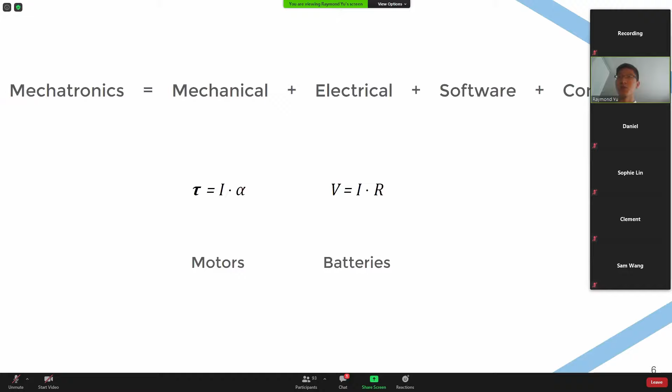In terms of software, we've all seen a bit of code before. It could be as simple as Arduino code, or as complex as machine vision.

Finally, the last part of mechatronics engineering would be the controls aspect, and you can see here there's a little feedback loop. A prime example of a controls engineering problem would be an autopilot system, whether for an aircraft, a ship, or a self-driving vehicle. Mechatronics is very multidisciplinary, incorporating aspects from all these different subsets.

And that leads me to my definition: a mechatronics engineer works at the interface between hardware and software systems, or essentially anything with moving parts that requires power.

Reiterating the definition, there are many different applications, ranging from automated manufacturing lines. We can see a multi-axis robot where you supply power to the motors, then turn the mechanical fixture so that the end of the arm reaches one point in 3D space without overshooting, reaching that exact point using a controls algorithm.

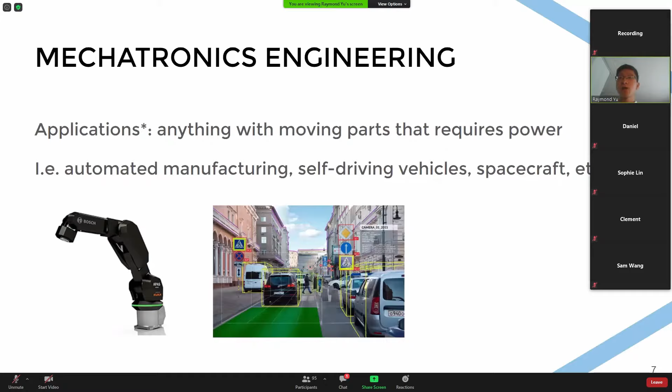Another application would be self-driving vehicles, taking data from various sensors, be it GPS or a computer vision camera, and then actuating the wheels, turning the wheels, or applying braking force.

A further extension is spacecraft or aircraft, which I'm most interested in. For example, the autopilot system of an aircraft is very much a mechatronics problem, trying to maintain level flight even in adverse weather conditions, to ensure all passengers on board have a pleasant experience.

Now I have a little asterisk next to the application. Even though my definition is that anything with moving parts requiring power is mechatronics engineering, that doesn't mean you can't specialize in a particular field of it, because mechatronics engineering offers a great foundation in various technological disciplines.

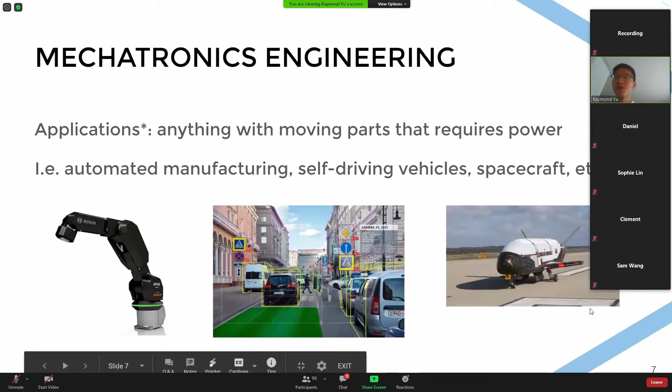So how can you start yourself? Well, all these things have one thing in common. You can all start learning or experiencing what it's like to be exposed to mechatronics engineering by just having a little Arduino project, driving a motor, perhaps holding a position, getting user feedback, so you can experience this at home.

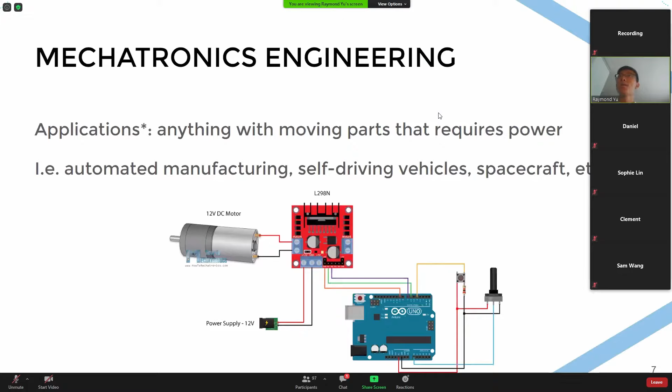Now this would be the first case study which we're going to explore. A little shout out to the UBC Unmanned Aircraft Systems student design team for providing these lovely graphics, and also for providing me the invaluable experiences which allowed me to succeed today.

Now, first off, what is a drone? The US Federal Aviation Administration defines a drone as a powered unmanned aerial vehicle that can fly either remotely or be flown autonomously, and can also carry a payload.

They can range from very large fixed wing drones that can be weaponized, like you see on the left. They can also be little hobby grade RC aircraft, as you see in the center. And they can also be the very ubiquitous and widely proliferated DJI drone products you see on the right-hand side.

In this particular case study, we're going to be exploring a drone that's the size of the DJI product on the right-hand side. In the subsequent case study, we're going to explore a slightly larger drone, in between the size of the center and left-hand drones.

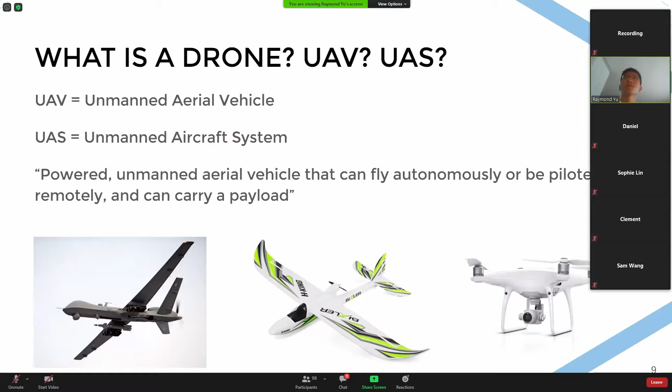So this is the drone in question that we're going to be exploring. This is a custom designed, custom built quadcopter with around 25 minutes flight time, with a maximum takeoff weight around 5 kilos. It's a very robust engineering tool.

Let's continue with the drone architecture. You can see the drone is comprised of many different components, but at the heart of every drone is a flight controller, which is that orange thing labeled cube. That's the brains of the drone - all the sensors, all the motors, any peripheral all reach that at one point or another.

Then towards the left, we have the payload. Oftentimes it's a camera, but it could also be a smaller unmanned ground vehicle, or a package to deliver, for various different applications.

Towards the bottom, we have the motor and motor controller, which provide the lift and power required for the drone to lift off. There's a power distribution board separating the energy from the battery to feed into both the motors and all the other peripherals, like the flight controller or the payload.

And then towards the top right, we have the range of sensors and telemetry systems which allow the drone to sense, to feel, to know where it is in 3D space in order for it to complete its mission.

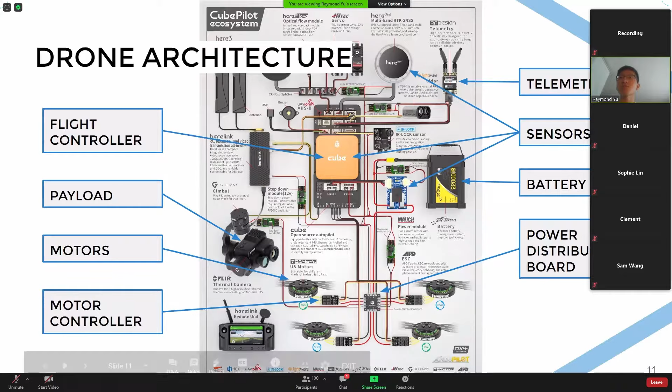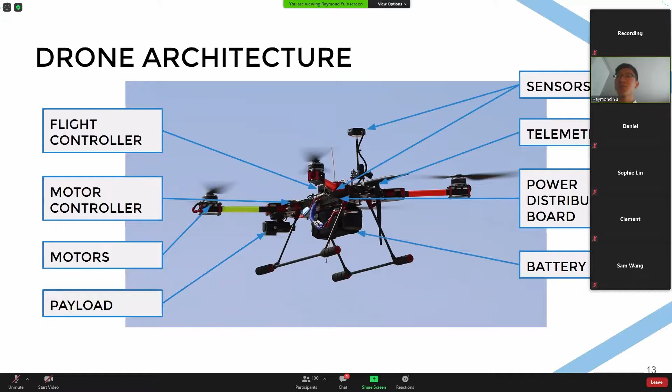Now, bringing it back to this drone, we can see that the architecture is labeled. Towards the center of the drone, we see the flight controller, slightly hidden by a boom. We see the motors and motor controller at the end of the boom and within the frame. We have a payload of a camera in this case. We also have a battery, a nice big heavy brick, in addition to a power distribution board above it, and we also have the telemetry and sensor suite. The sensor right at the top of the drone is the global positioning system.

Now I'm going to be emphasizing the flight controller, the propulsion system, which comprises the motor and motor controller, as well as the sensor and navigation suite of the drone.

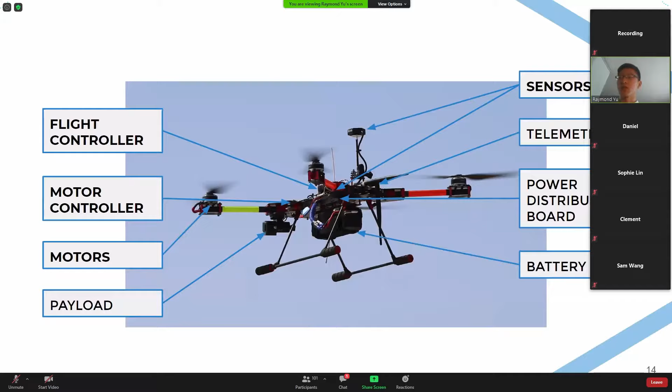So this is the flight controller. Without a flight controller, the drone would likely crash, so it's a very key part of the aircraft. It is the brains of the aircraft. Any commands, any user inputs, it's all handled by this little computer on board.

At the output of the PID controller, we have the actuators, which are the motors of the drone. The actuators allow the quadcopter to move around, to navigate in 3D space. Then we have a feedback loop with the various sensors on board. This loop runs continuously with the control algorithm to maintain steady flight or desired flight characteristics.

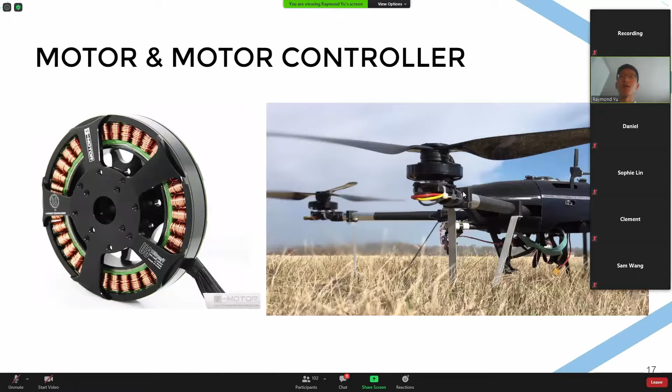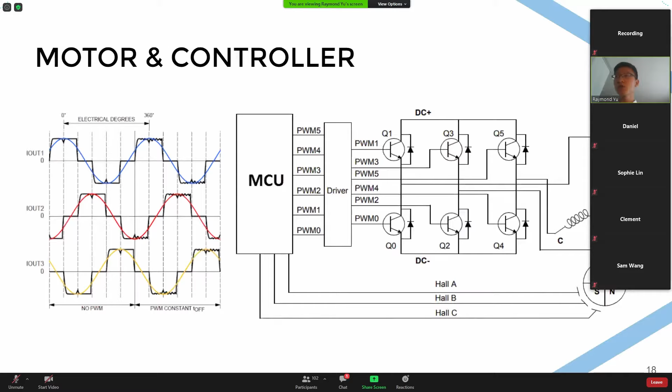The MCU is a little controller, almost like the flight controller, but just for the motors. The controller, the MCU, sends out one of these little signals to a driver. The driver then amplifies that signal, provides more power, more voltage, more current to it, so it can actually be fed to the motor. We have different switches here, which allow the signal to go from positive to negative. That switching sequence then energizes the coils of the motor, thus spinning the motor, the rotor, which comprises permanent magnets. We also have a feedback loop here from Hall effect sensors, which detect the magnetic field of the rotor, and that signal gets fed back into the controller, continuing the feedback loop.

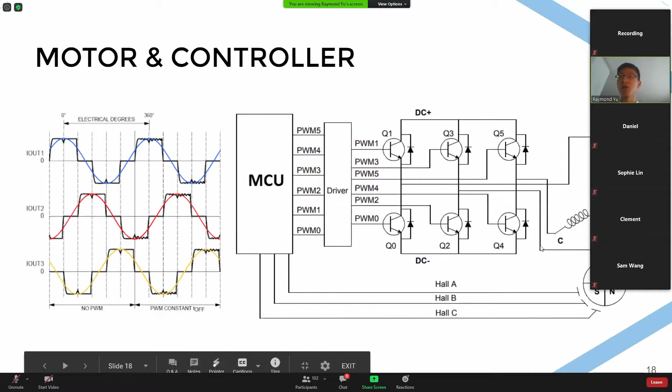All right, the next part I will explain will be the sensors. There are many different types of sensors on board the drone, from a compass to a voltmeter to measure voltage to a pitot tube for airspeed.

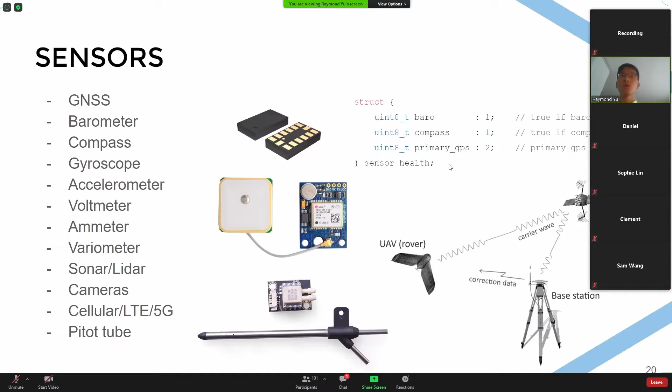This type of sensor fusion algorithm can be called the Kalman filter. That Kalman filter can also filter out noise in real time, so you can get better sensor data for your flight controller.

Now, this concludes the first case study. On to the next one.

Now I'll also try to connect how the skills of a mechatronics engineer helped here. Brief disclaimer: everything that I say or show in this part of the case study or presentation is taken from a public source where I have authorization to use it.

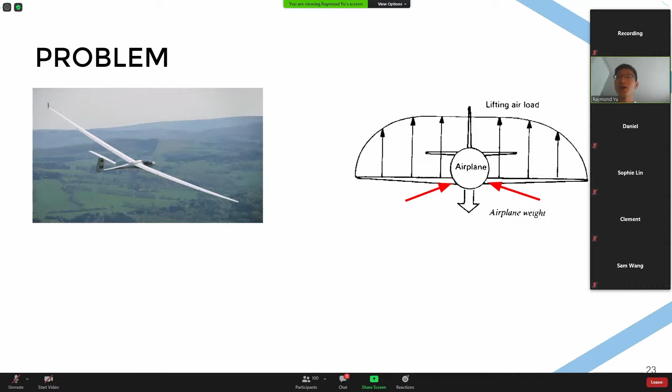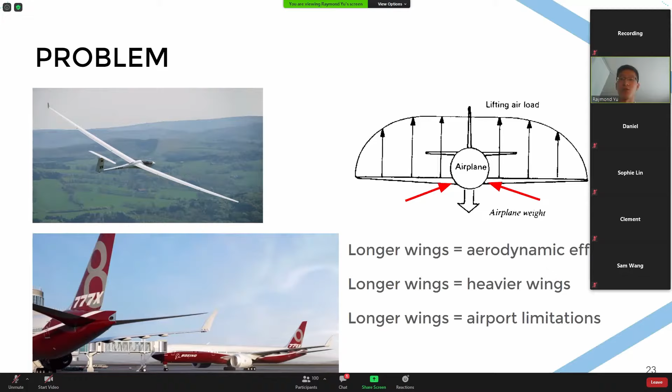And what's more, a longer wingspan also means you can't fit into airports as well, which is why the 777X has folding wingtips. So in conclusion, you want longer wings because they give better aerodynamic efficiency, but the downside is you need heavier wings to reinforce them and prevent them from snapping, and longer wings also limit the number of airports you can fly to. So what's a solution?

A solution is the semi-aeroelastic hinge, as demonstrated by the AlbatrossONE. You can see here that even if there's a gust along the wing—and this wing is actually quite long compared to the actual aircraft it was scaled off of—instead of the energy being transmitted along the wing, that energy is used to bend the wingtips, so you won't need as many structural reinforcements along the wing. So you get the benefits and advantages of a very long wing without the additional weight penalties.

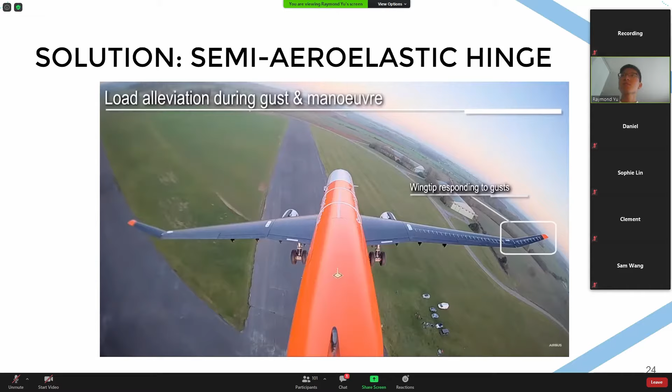Within the AlbatrossONE, there's a large assortment of different sensors and instrumentation systems on board. I hope I mentioned that sensors are a very important part of mechatronic systems. I was one of the lead designers of its flight test instrumentation system, incorporating all these sensors and more into the aircraft so we can get actionable data from its flight test campaign. We can see the position of some of the sensors on board the aircraft—there's a camera on the tail.

We have a voltmeter and ammeter to measure the power being delivered to the engines. We have the GPS, barometer, compass, etc., and a flight controller within the fuselage of the aircraft. We also have various air data sensors in the nose and many other sensors which can be seen from this view.

As one of the lead designers of its FTI system, I'm responsible for selecting the sensors, building the wiring harnesses, programming the microcontroller, characterizing the antennas, coding different scripts to retrieve the data from the sensors, as well as post-processing the data.

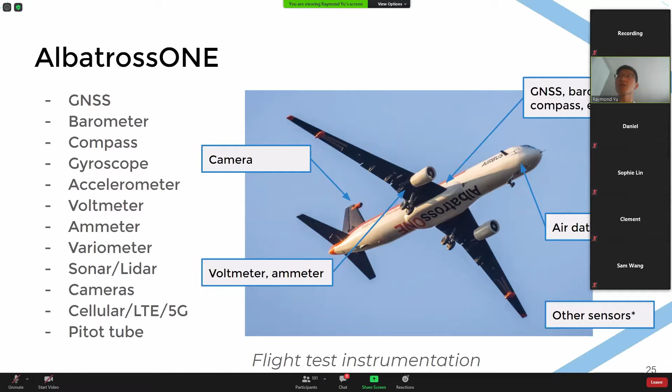And then we have a printed circuit board here, which we can compress large circuit boards onto. Some of my roles was to design the printed circuit board for the flight data recorder, as well as to use an oscilloscope to verify the integrity of the different signals, and to shield and mitigate electromagnetic interference effects, ensuring all the sensor data had clean readings.

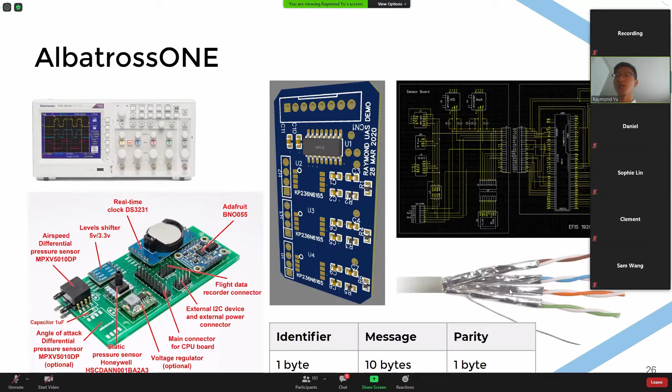There were different signal readings, as some could be noisier than others, so we had to filter some of the data to determine the conclusions. I also supported a lot of the flight test activities on the flight line. You can see here I'm running diagnostics and troubleshooting possible issues with the aircraft on the flight line during a lull between flight test campaigns.

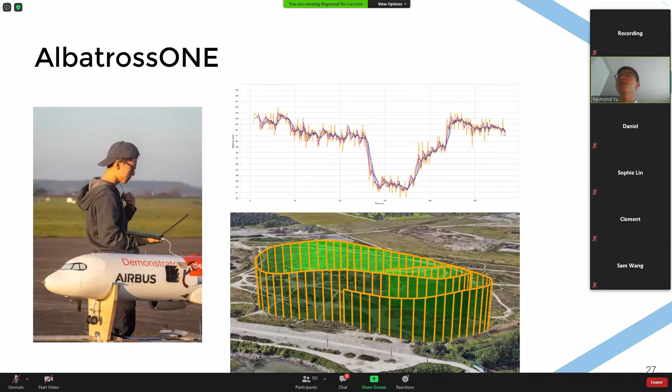And this concludes the case study.

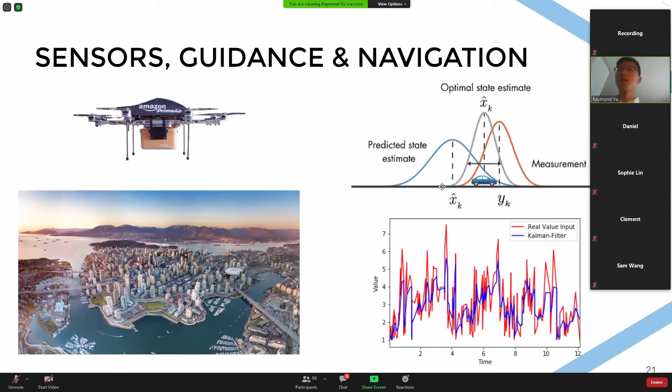I hope that explains it in sufficient depth for the purpose of this presentation.

Can you describe more the application process you took to land your job or internship at Airbus?

So I did mention before that you can start off with an Arduino project, and I think that's quite important. You need to complement your academic studies with personal projects. You can teach yourself the skills and experience needed for these jobs, but you can't teach yourself the passion or interest. To work at Airbus, you obviously need an interest in aircraft, but complementing that with hard skills through a student design team, like UBC UAS or an Arduino project, really makes you stand out from your peers.

For the particular application process to Airbus, I just applied online, but I had enough keywords and projects in my portfolio to give me a competitive edge.

What kind of student club should I join to boost my skills and knowledge for mechatronics, robotics in particular?

Well, you can join a team like UBC Unmanned Aircraft Systems, or a student design team - some teams at UBC focus on robots, like Thunderbots and Subbots. I'm sure SFU has a comparable amount of clubs as well. If not, you can just do various personal projects.

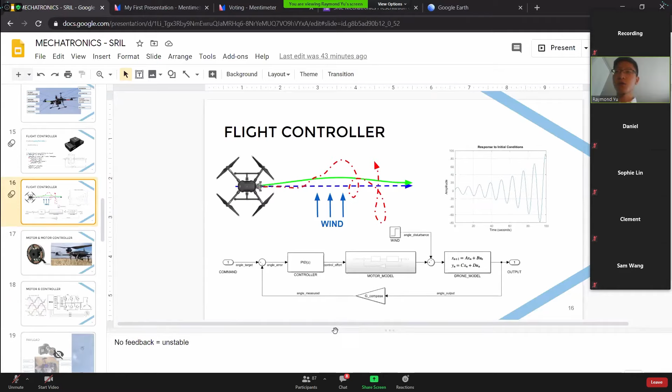How is instrumental data converted to useful data in a feedback loop? So this is part of the feedback loop. Let me go back into here. So all the instrumentation data comes inside the feedback loop. For example, that little compass, the G-compass, that's the feedback you're receiving from the aircraft sensors. Without this feedback loop, the drone doesn't know how much it deviated from its flight path, it just wouldn't know because you have no way to sense it. So your response would likely be something undesirable without it.

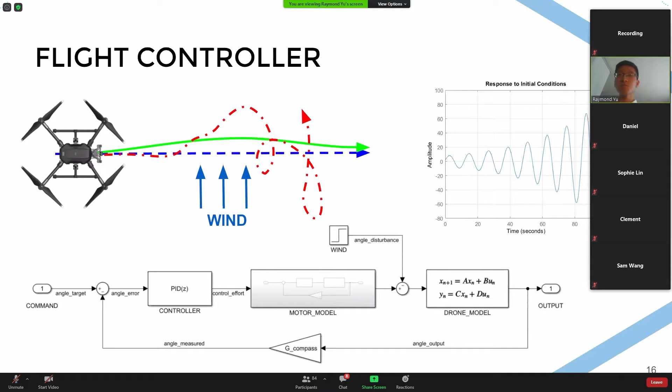I've checked out the job market, and quite a few engineering jobs require either mechanical, electrical, or software engineering specifically. How likely have you found it to be noticed and hired? Well, like I mentioned before, mechatronics engineering offers a very nice foundation in mechanical, electrical, software, and controls engineering. By having this degree, more doors are open for me because I'm able to do a job like a mechanical engineer would do, working with stresses, aeroelastics, torsion, heat, friction, thermodynamics, or working with electrical systems through a microcontroller, wiring harnesses, or wireless telemetry equipment, or software designing firmware or writing scripts for computer vision algorithms. Having a mechatronics engineering degree allows you to pursue multiple more avenues.

What inspired you to pursue mechatronics? Well, I think I liked airplanes, so I wanted to study mechanical engineering, perhaps go into aerospace. However, I also recognized that the technology, not only the vehicles but the aircraft of today, are becoming more digital and electronic, with millions of lines of software code. That's what drove me to pursue mechatronics engineering as opposed to mechanical or aerospace engineering. I'm sure this is relevant in many fields as well.

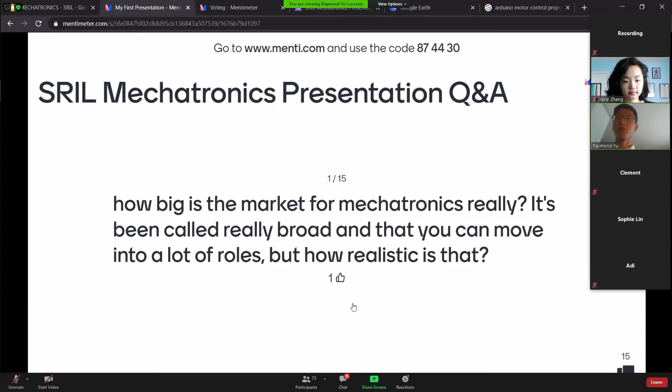If I'm interested in the aerospace industry, is it better to study mechanical or mechatronics engineering for both general and electric aircraft? I think I touched on this before, but I understood that aircraft today are becoming more digital, electric, and connected, which is why I chose mechatronics engineering. If you want to focus more on aerodynamics, aeroelastics, or other pure aero aspects, perhaps mechanical engineering is a good bridge into a master's in aerospace.